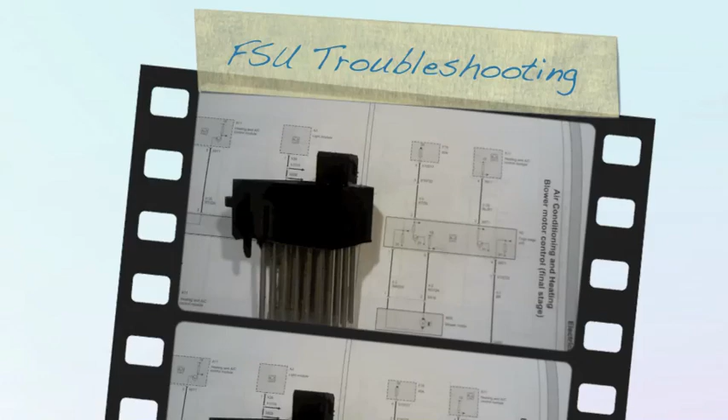There are actually several good videos showing how to replace the blower resistor pack / the final stage unit on the E39s. I thought I'd make a quick little video though about actually troubleshooting it prior to replacing, because it's really easy to do that as well.

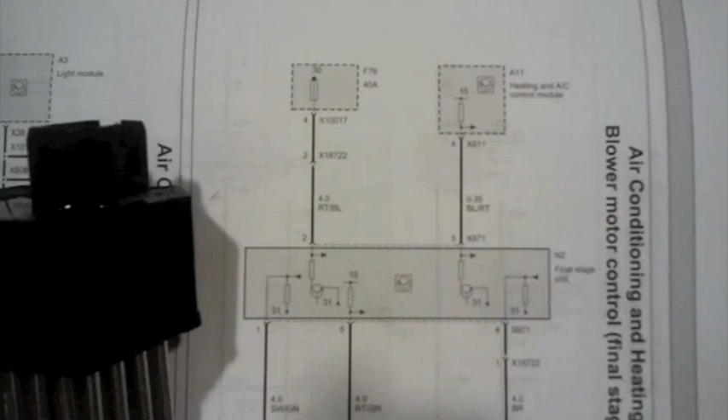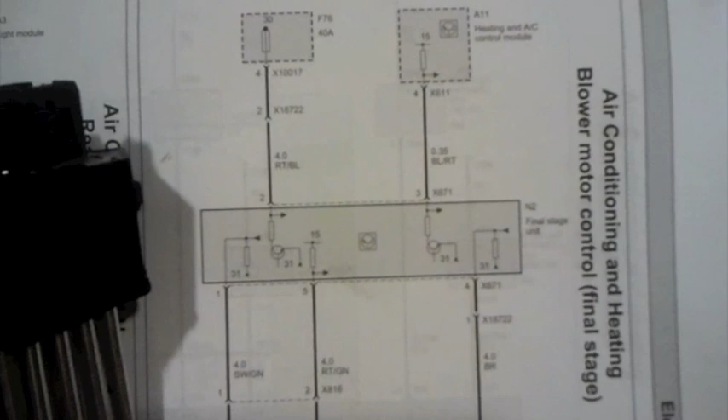Alright, on my car, this is a schematic for it on the 97 that I have. If I can get this to focus. Alright, so you have the one fuse, 40 amp, which I've still yet to find on mine because it's not in the location it talks about, but it's still easy to check power. So what you want to do is go to the final stage unit, which is in the passenger side footwell, and again there's videos that show you where it's at,

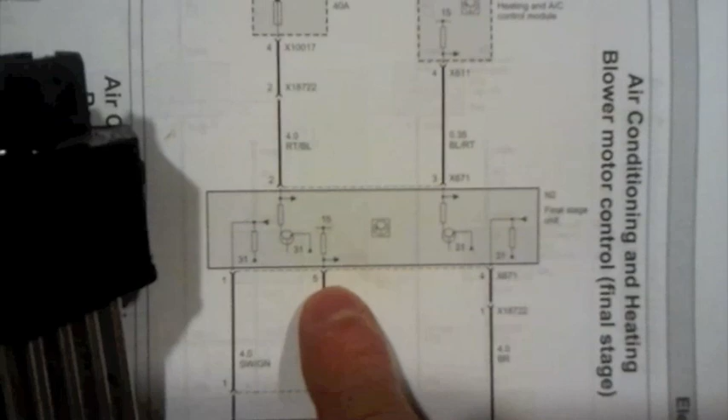and you'll actually see it too when I get my meter out later. But what you want to wind up doing, as you can see, the power comes into pin 2. Your blower gets the regulated power from pin 5. Hopefully I get that to focus. And so what you want to do is take the connector off here, make a jumper from pin 2 to pin 5. And the only thing left to do is put a ground on pin 1, and if the blower is good, it'll come on.

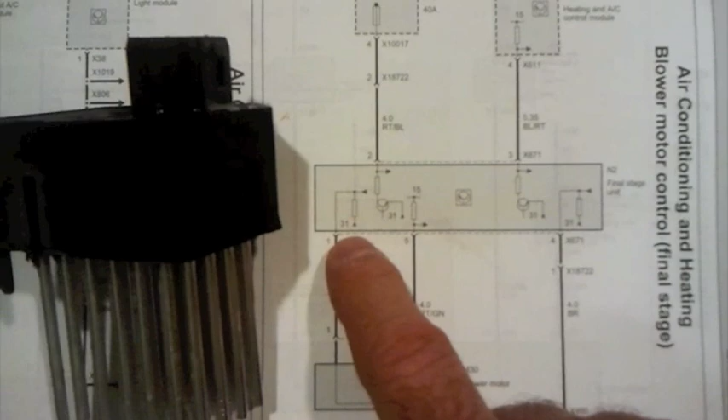And there's one little bit of info here, let's see if I can get it to focus again. Sorry, this is on a cheap phone. You see the 31 number in all the prints. 31 is going to be your ground, and the 15, that's going to be your regulated power basically.

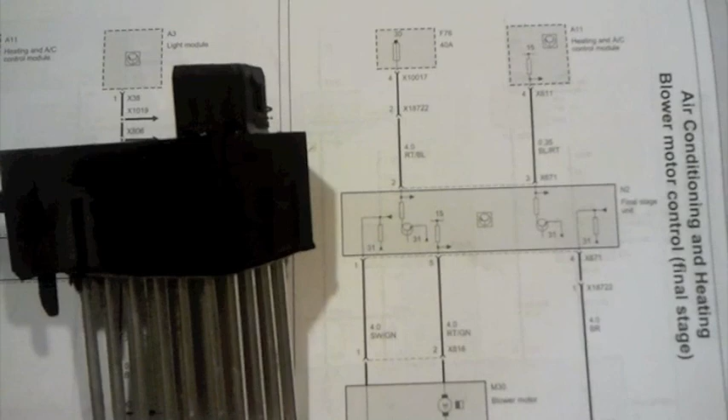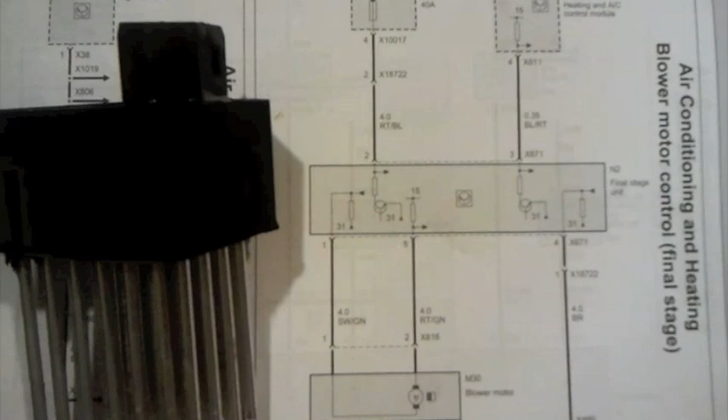Okay, one obvious thing too when we're doing this troubleshooting is some of these E39s can be a little bit different, so you need to make sure that this one applies to your car. Like I said, mine is 97, and this is the way mine's set up. I was able to verify through the schematic. And then, of course, it's done at your own risk, but it's really pretty easy. Use common safe practices, and it won't take you long to do this, and you'll know exactly what's wrong with it.

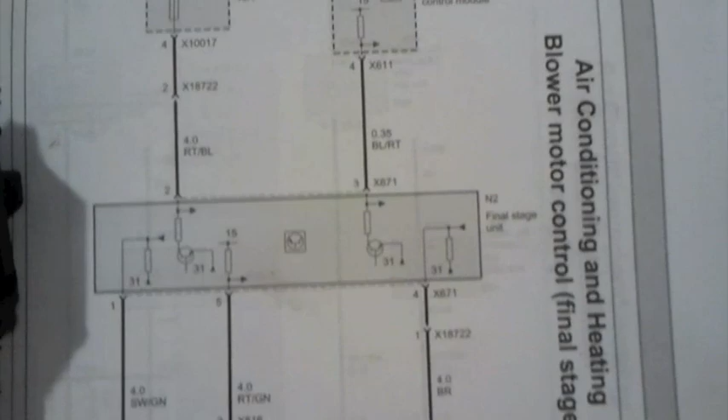Alright, first thing we want to do when we go to the car is check for power. And like I said, that power comes in to pin 2. And to check this, just go from one of your leads on pin 2 with your meter. The other meter lead will go to pin 4, if I can get this thing to focus again. But that'll be your ground. So put your meter there, you should see your 12 volts.

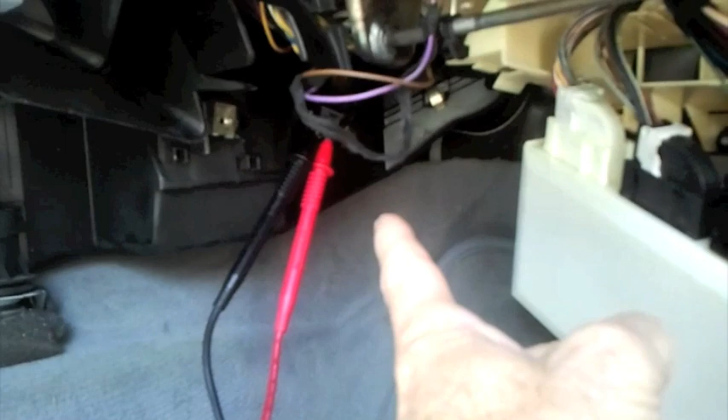Alright, so the resistor pack, you gotta take off this side panel, and it's buried right back in here. I'll show you a better picture later. Hopefully with this phone camera I can get a little bit better. But just go ahead and hook it up. Meter there from pins 2 to pin 4, and make sure you got good power.

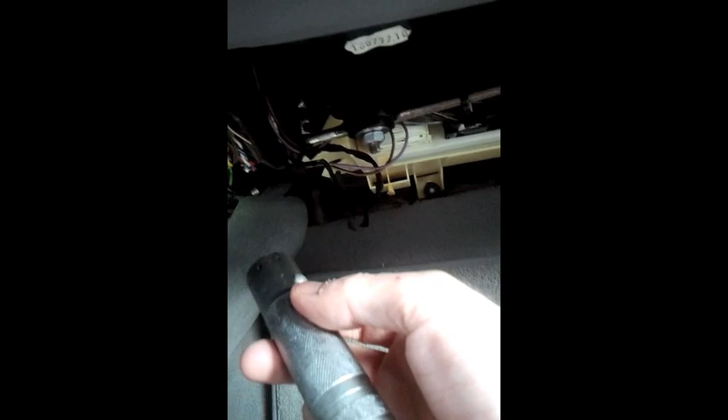Okay, I got the jumper in between pins 2 and 5, and so the only thing you need to do is go from pin 1, and I use this bar right here with the ground, and that way you can test to see if the fan or the blower is good or not. So go to pin 1, press that. That way you know your blower's good.

Okay, so we verified we had good power going to the FSU by going between pin 2 and pin 4. Then we jumpered it to give the full power going to the blower, and went from pin 1 to ground. So once we did that, the blower came on, so now we know the blower's good. Now granted, the FSU is a high failure item, and yes, you can go out and buy one and plug it in and see if it works, but as you can see, it only takes a few minutes to do a little troubleshooting, and then you'll know for sure if it's bad or not before you go buy it.